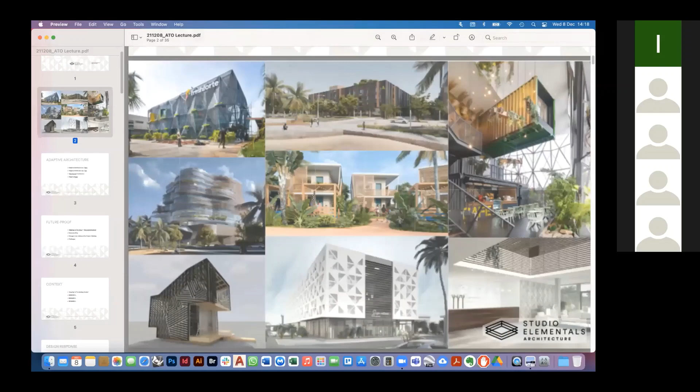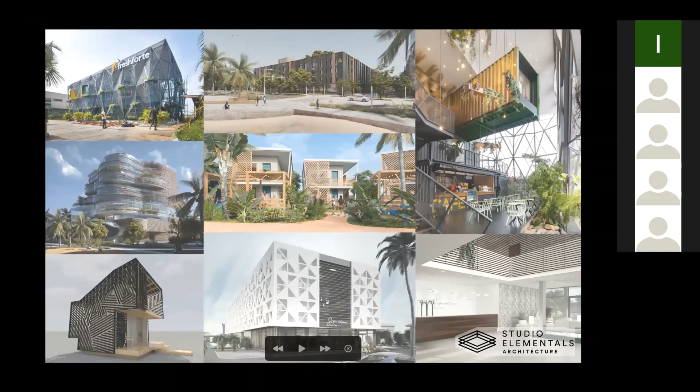Okay, wonderful. So I would like to start with mentioning that our work at Studio Elementals strives towards making a positive impact on emerging urban environments, which are very rapidly changing. And therefore, the theme of adaptive architecture means a lot and is really important to me personally as well. Adaptive architecture can be used as a term, and it usually means a framework which changes its structure, behavior, or resources according to request. It's often driven by internal data and also includes buildings that are designed to adapt to their environment, inhabitants, and objects.

Adaptive architecture can also be used as a tool, and it is there to create buildings which are flexible, sustainable, future-proof, rather than fixed objects trapped in a particular context and time. And there is also adaptive reuse that can be applied to existing buildings. Now, if we look at the term future-proofing, it's quite a broad term that can encompass not only buildings and infrastructure, but also communities, cities, countries, or the whole planet. It has adopted different meanings as well within different contexts, ranging from resilience to climate change to demographic changes and resource security. So the question is how changes might happen in the life of a building, right?

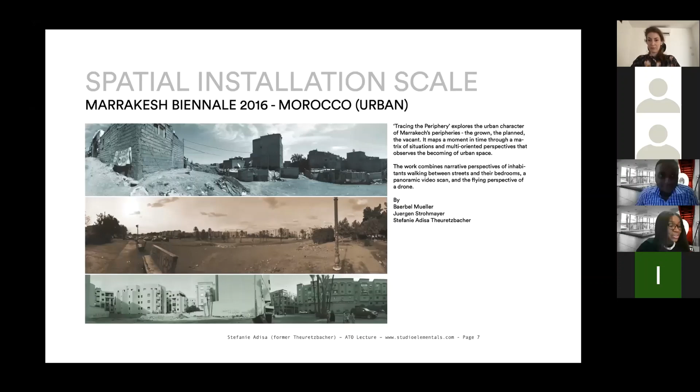And the project explores the peripheries of the city through various different ways. So it's basically a spatial research that was done with the help of a video installation and drone shots, as well as perspective views and also flying and also inhabitants walking between the streets. And this was later on put into a spatial installation that was quite immersive into these dome-like structures in Marrakesh and as well in Accra for the Chale Wote Festival.

And I think this is a more alternative way of research. It's not research per se in the academic way, but it is research that is very valid in the architectural world, and that can also help us portray different experiences of the city.

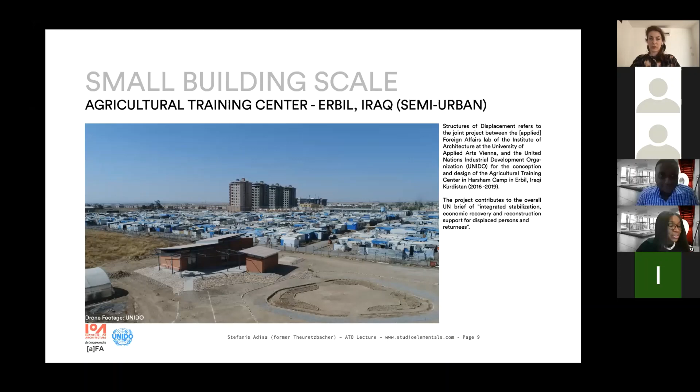The next example is a small building scale, and I would like to use this agricultural training center that was a collaboration between the University of Applied Arts Vienna and the UNIDO. And what was special about this project was that the scope and location wasn't clearly defined. So a lot of research had to be put in place ahead of time to even understand the location. This project was meant for internally displaced peoples in Iraq due to ISIS and the recent difficulties in the area.

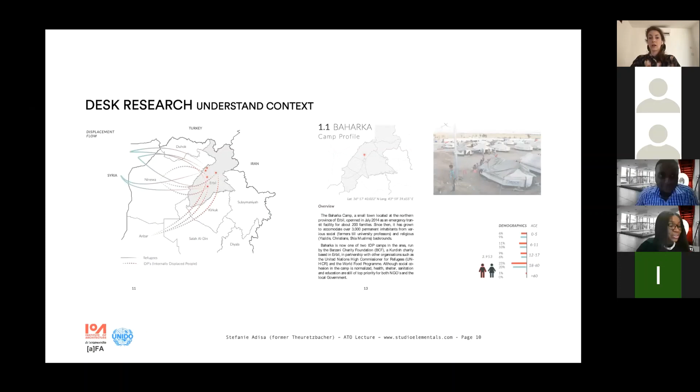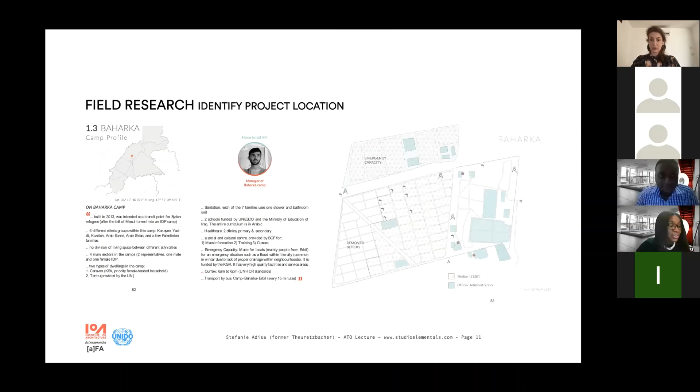And ahead of time, a desk research was done for several months actually to research different flows of IDPs into the area and also into existing IDP and refugee camps in the area. And at the same time also doing a field research on site, trying to understand the views of people, doing a lot of interviews, also walking through existing camps, looking at their organization and how that could possibly impact a building design, also understanding the spatial setup of such a camp.

And in the process, we realized that a lot of infrastructure is actually already in place, but what is missing is a space for women that can be a safe space and also a private space for them to undergo training, but also just hang out and have a good time. Then there's always the possibility for additional research once a project has been completed. In this case, there was a student project after which an exhibition was also held at the University of Applied Arts and an additional publication.

So I think in architecture sometimes this post-production phase kind of gets lost because we have a lot to do from one project to the next, but it can't be enforced enough that this post-production is also a very important tool for understanding our next goals and also understanding how we can adapt to the future and to other projects.

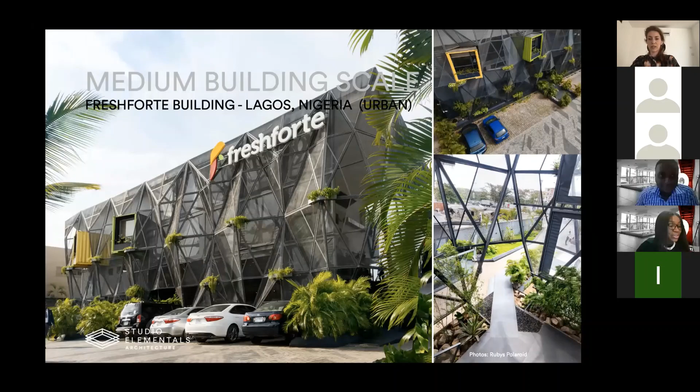Then I would like to continue with a medium building scale. This project is located in Lagos on Admiralty Way, and the special approach in this case is how the building is embedded into its surrounding context in a way that it is more accessible to many people around compared to other projects in the area. So a lot of detail has also been put into the landscaping, and you can see that the site is very open.

It's almost as if the street kind of draws in to the building and includes the building into its urban environment. So to me, site plans are a very important tool to show context and to understand context and how we can work with it. A lot of times people see the site as one rectangle that is independent of the rest of the surrounding, but that's not the case for us architects.

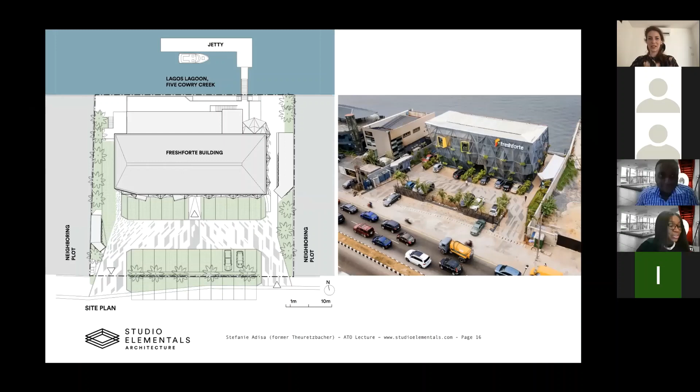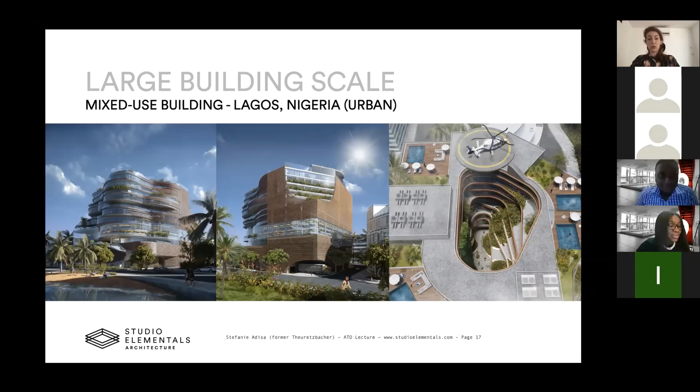Then I would like to also give a large building example. The client was into agriculture and requested for a lot of urban farming to happen in the building, and also a lot of planted elements. So to prepare for this project, we did quite a lot of research into this direction, and I will lead you through that in a second. What was also special is the location on Gracefield Island in Lagos off Chevron Drive, which means that we have an empty site. There is no immediate context, and we now have to draw from maybe history, cultural elements, and we need to come up with a design story that is still interesting and has an impact on the building.

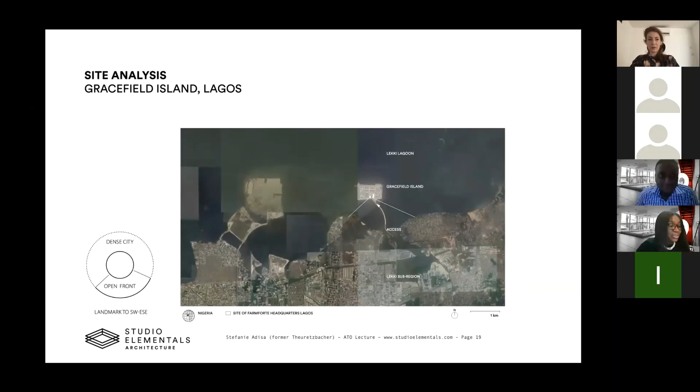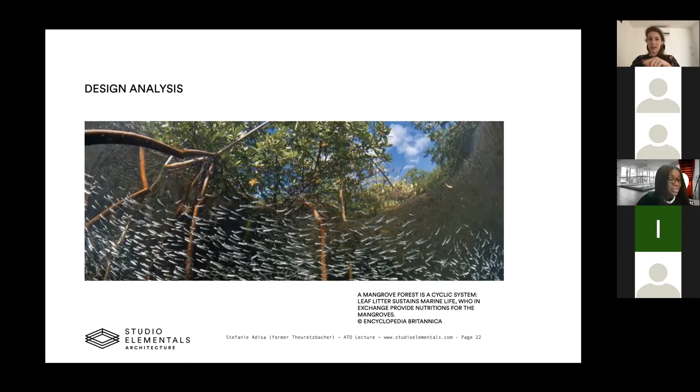So of course, we always have to do site analysis and also wind analysis, very important in such a case. And we looked a lot into urban farming and how this could be integrated into a building, such as outdoor community gardens or vertical gardens or even greenhouses. In the process of that, we also realized that the initial natural environment of the Lagos Lagoon was mangrove forests, which kind of has been forgotten over the years because now we only see buildings and water. And mangrove forests are actually quite fantastic in the way that they form a cyclic system. And I will explain that more here.

So once leaves from the mangrove drop into the water, they actually decompose, become nutrients for little fishes and oysters, which then become food for fishes, and then the remains go back as nutrients, which then are treated again by the mangroves. And it's quite interesting because this same system is used in aquaponics, where you use a fish farm to water plants. So the nutrients of the fish remains are pumped into the earth and become nutrients for plants. Then the plants clear the water, which now becomes a beautiful cycle.

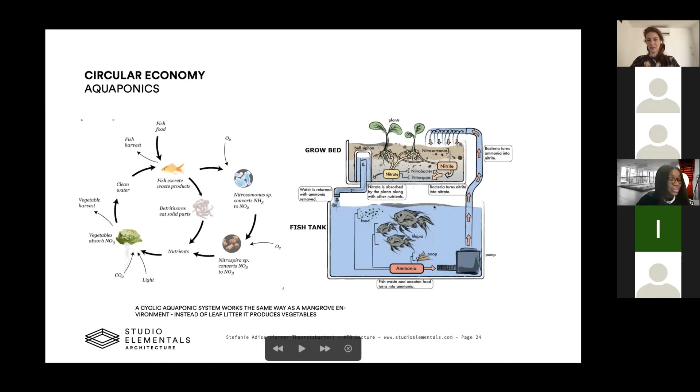And these two logics can actually be transformed into a building logic as well, if you think about it in broader terms. So a public lagoon, or let me say, a dense rooting system could be a warehouse, for example, or the water level could be an aquaponics pond, and so on.

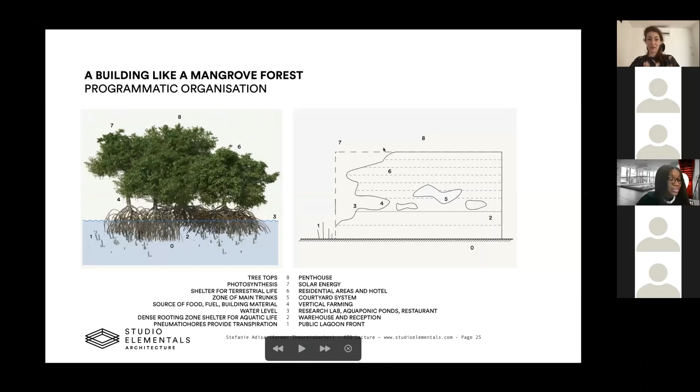So you can really translate this mangrove forest into a whole building with its different elements and draw from that as an inspiration. You can even take several elements of this mangrove forest and turn them into architectural elements such as screens, facade elements, and just spatial moments.

So what I'm trying to say is really that if we do our research and also take inspiration from further away, we might also come up with something very meaningful and interesting and new in the current context that we are in, something that is for the future.

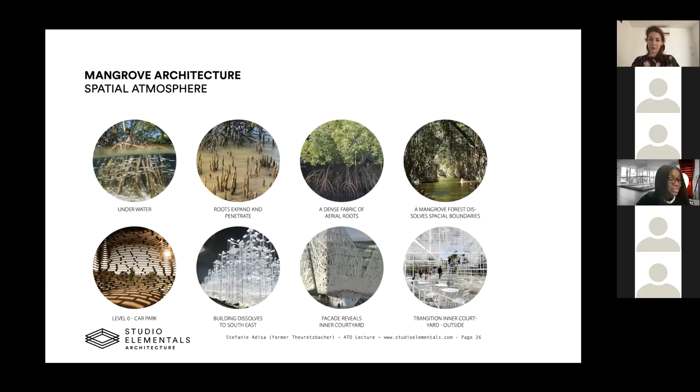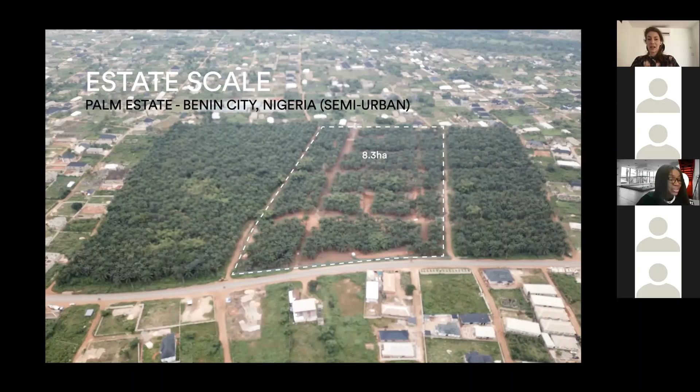Then the last project is on an estate scale. It's called the Palm Estate because the project is located within an existing palm plantation. And what is wonderful about this to start with is that we have existing trees that are even in a grid. And second, we have the very rich Benin building culture that we investigated in the course of this project. So there's actually so much to draw from existing cultural knowledge or even lost cultural knowledge.

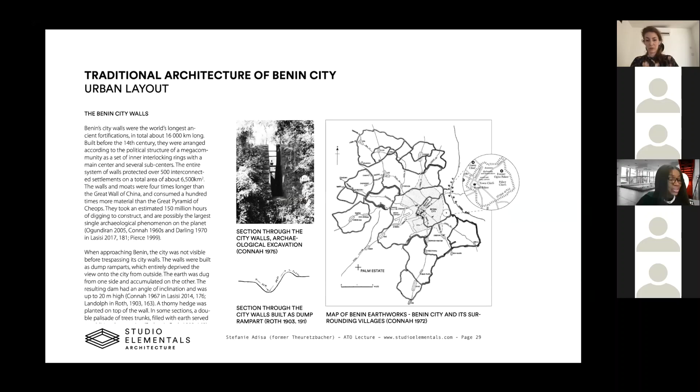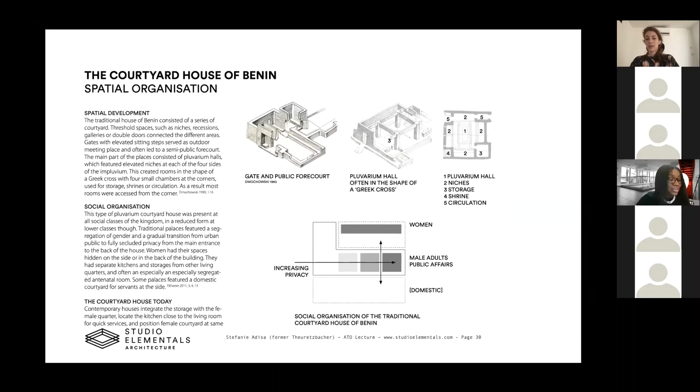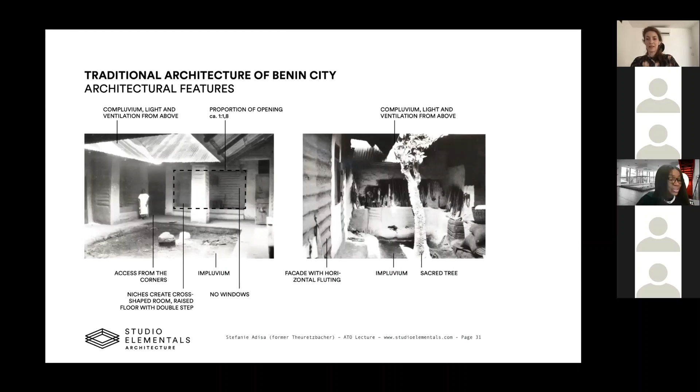There is, for example, the urban layout of the old Benin city, which was actually the longest wall system in the world, which is so interesting, and a lot can be drawn from that also in terms of section. There is the traditional courtyard house of Benin, which goes from more public to more private buildings. And then we can also learn from the courtyard systems, from drainage systems, impluviums, and trees within our buildings, and how that also translates into a whole estate layout.

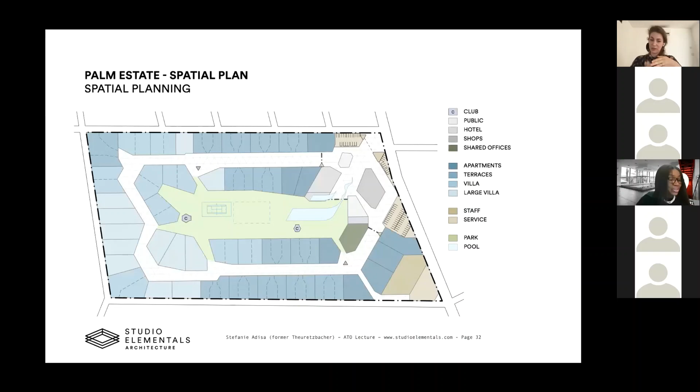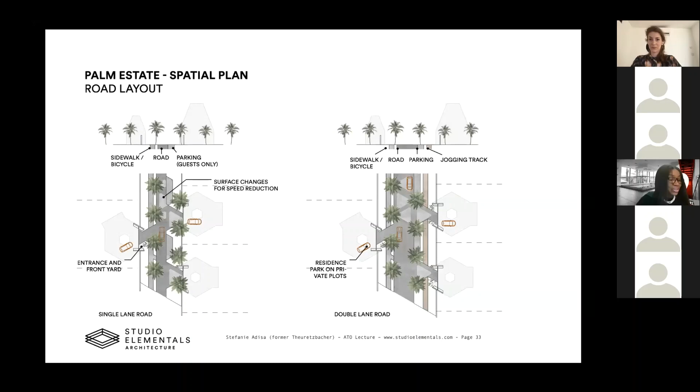So we followed the palm grid, which is actually a triangular grid. So you can't have a rectangular street grid working with an existing palm grid. And this can also follow into the details such as driveways and how the street feel comes about. Everything becomes different, and the palm grid is something that you can really rely on to come up with a more interesting or more adapted design solution. This would be the result of it. So it comes up with a spatial plan that is way more organic compared to a rectangular grid.

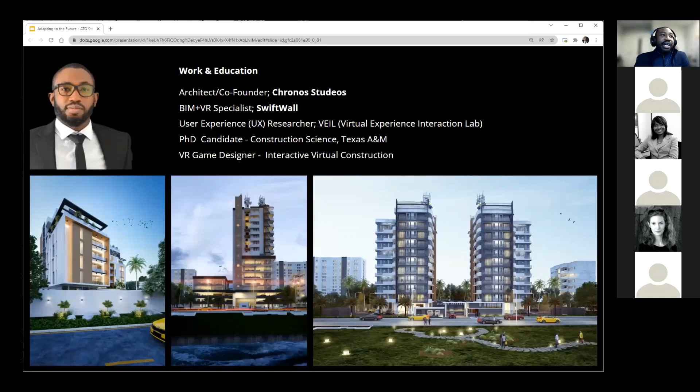And now today we'll be looking at content regarding first adaptation. We're going to look at the past and the future. And also we will look at questions and opportunities in architecture, engineering, or construction. We're going to also talk about collective intelligence, which usually is an ultimate power.

And also we'll talk about VR, AR, and AI, standing for virtual reality, augmented reality, artificial intelligence in architecture, engineering, and construction. And we'll be thinking about the whys, the whats, and the hows. We don't have a lot of time to cover AR and AI today, so I'll talk mostly on what I'm doing on VR.

So here is my popular, I call it my popular, quote about the future. I always think that the future is an opportunity to connect the dots for humanity. We must embrace it to build better living, more productive businesses, and ultimately happier people. Keywords, ultimately happier people.

As much as we see how everyone is trying to think about what the future is like, one thing is important, and that is we need to make sure that people have better lives, with the living conditions, the jobs, the businesses. Ultimately living in great conditions and being happy is something we need to consciously gear our objectives towards, because there are a whole ton of global issues that we don't even want to start talking about. But again, if we start here, we probably may be able to conquer all of those big issues. So let's look at what adaptation is in the past and in the future.

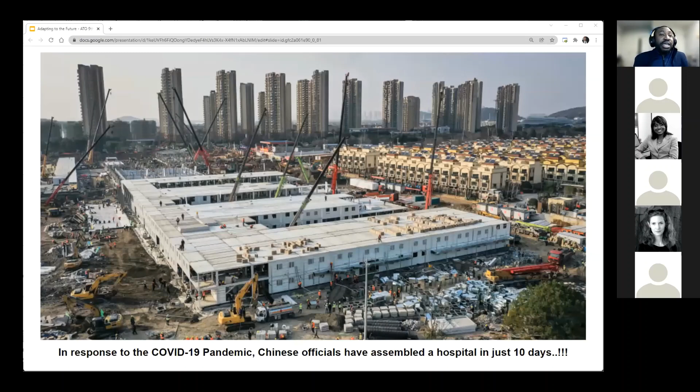And in this particular case, robots were delivering medicine and collecting test samples instead of nurses doing that. So we got a rude awakening to say that, look, the world is moving very fast, and now we're going to that interface where humans and robots are actually going to start interacting. Now, beyond all that you see, there is a ton of stuff that goes on behind the scenes.

And usually I split everything about a business or any model that works into three. You have a product or service, you have a process, and then you have people. And there is a ton of things that make all of this work together. There are touch points where the outside world sees, there are interfaces between the outside world and the inside. There's cloud synchronization of files and data, everything is live. And of course, a lot of times there's also local storage as backup in case of failures.

Then there's a ton of collaboration across disciplines. And when you're collaborating across disciplines, you have to have an idea to an extent of what the next discipline is doing. That way you can infuse your own professionalism, your discipline, and make the best out of it. There's security, there's encryption, there's data protection, there's outreach. How are we telling people what we're doing? How are we showing what we're doing?

I mean, just imagine that the live stream was actually set up even before the construction started. Who thought about that, right? It wasn't just a response. It was well planned and thought out. And then there was analytics. How did we do? How much did we cover? Where did we fail? What are the responses? What was the perception? What can we do next to make things even better?

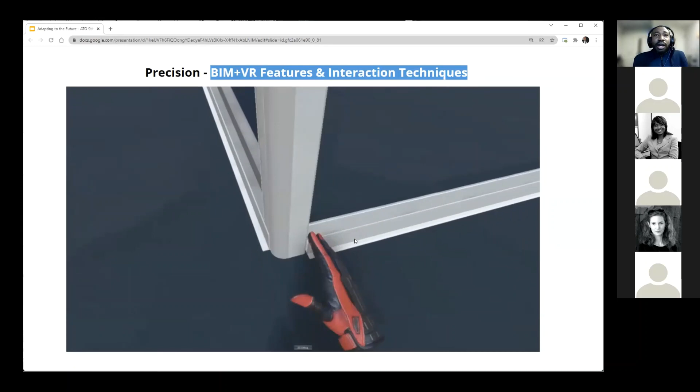So we did some testing on precision. And very interestingly, we were able to get the precision to almost a 0.01 precision level, which was very tasking. It was a lot of coding. But again, there's a lot to learn from this. We got very interesting interaction techniques to learn from.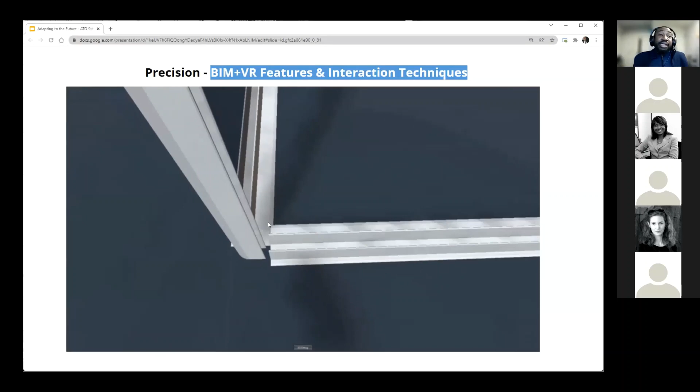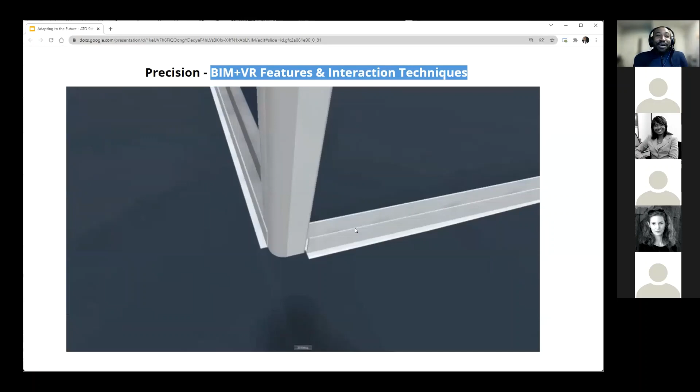And we were able to achieve huge precision and a lot of realism, lighting, texturing, baking, and scaling. And we actually realized that people performed better when the objects were slightly smaller than the real-life scale objects. For some reason, we don't know what that reason is yet, but that was an interesting find.

So let's talk about the quick results in how we were able to match reality with virtual, matching performance between physical and virtual. And we actually realized that there was a lot of similarities in the performance, timing, especially after we started to optimize the game. We increased the frames per second rate. It was smooth to play. There was no lag. There was no hardware interference.

And we also realized that being able to do all of this in VR actually cuts down a lot on having to prepare physical training materials. We saved on a lot of carbon footprint and cost. And also, this basically gave us grounds to work on a commercialized version where people can actually pay on a subscription plan or any kind of payments and get trained to carry this product.

So here is the takeaway from my presentation today. It's important that professionals in the architecture, engineering, construction industry actually have a lot of self-development and adaptation to career opportunities. It's going way beyond design. Everything doesn't end at design nowadays. A lot of things are changing.

So it's advisable that people don't get very stuck in the mindset that, oh, I have to be able to design a 50-floor building. No. Sometimes you might have something else to offer as an architect and still be on that 50-floor building team, really. So make sure you're developing yourself, learn as wide as you can.

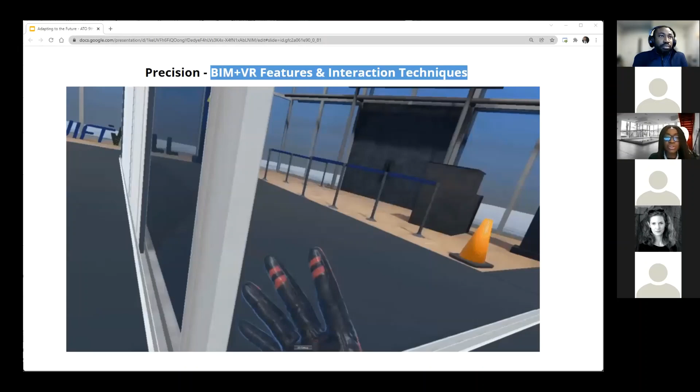COVID-19, for example, has taught us as an office, as a firm, and as an organization, that we needed to collaborate more. Some of the things that we talked about pre-2020, we talked about moving our information into the cloud. We talked about collaborating between our various offices, because we have offices in different parts of Nigeria. We were forced by the pandemic to actually make that a reality. And we found situations where we have design teams comprising people in different locations, and being able to leverage the strengths and capabilities of one person in one office to collaborate with somebody in another office. And that was really important.

Something that struck me as well was using BIM to sort of test run ideas, trial, does it work? Is it going to work? It's less expensive than finding out on site, and that's a mistake a lot of people are making. Some people are not investing in this software because they think it's expensive. I think it's more expensive to make the mistake on site. And so we should be thinking about things like that.

And then most importantly, the interviews, talking with your end users, finding out what's important to them, in a way, democratizing the design process. So yes, design is very important, but right now skills beyond design are required to be effective, to be effectual, and to adapt to the future, because you can design something that is stuck in today and it doesn't mean anything to the end users. Changes so fast. Yes, it changes so fast.

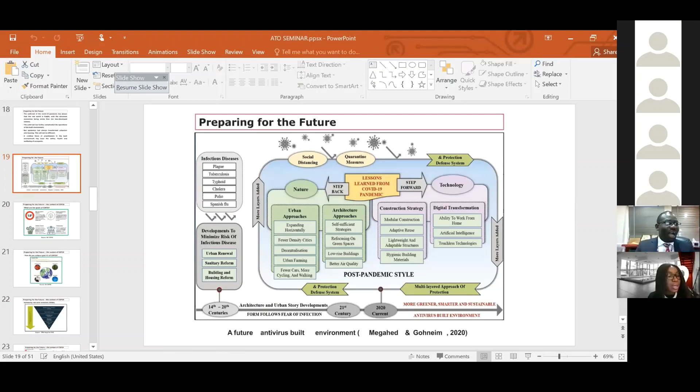So, okay, I will reshare it, but I will just quickly explain for the sake of time that we step back into nature and we step forward into technology. As we step back into nature, we look at urban approaches in addressing this problem in terms of expanding horizontally, fewer dense cities, decentralization, urban farming, fewer cars, more cycling and walking, and architectural approaches in self-sufficient strategies, refocusing on green spaces, low-rise buildings, better air quality.

And we step forward into technology, as Hassan had rightly presented it, in modular construction, lean construction, adaptive reuse, lightweight and adaptable structures, hygienic building materials, the ability to work from home, that's digital transformation, artificial intelligence, and touchless technologies, where robots and humans can easily interact. That is stepping into the future, that's technology. But I believe sincerely that our solution is in the combination of the two, nature and technology.

And we need to bring this together, even as we look at the goals of COP26, which are essentially for net zero. Countries are called to reach net zero carbon emissions by 2050 and to keep global temperature below 1.5 degrees centigrade. And we can see all the other goals as shown here. In reaching this goal, we must phase out coal, have more renewable technologies, reverse deforestation by 2030, and have electric vehicles.

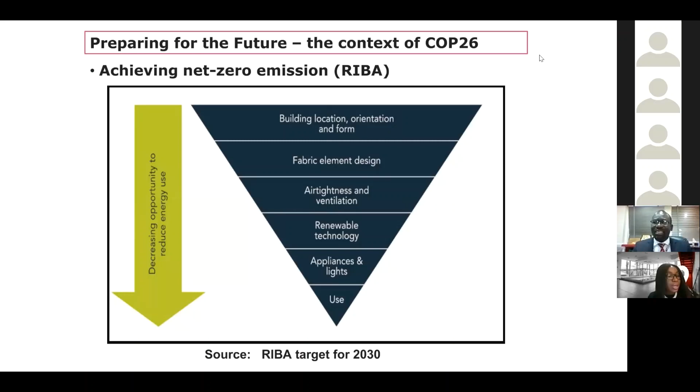And in achieving these net zero emissions, training also has to be in terms of the design of buildings, location, orientation, and form, which occupies the large band in this graph, and the lowest one has to do with use. So you can see from this chart that rather than relying more on appliances and gadgets, it all begins by getting the design right in terms of location, orientation, form, and fabric elements. It is through this we can essentially reduce energy use in buildings, just the same as in achieving the 17 sustainable goals, out of which 10 relate directly to the focus of our discussion today.

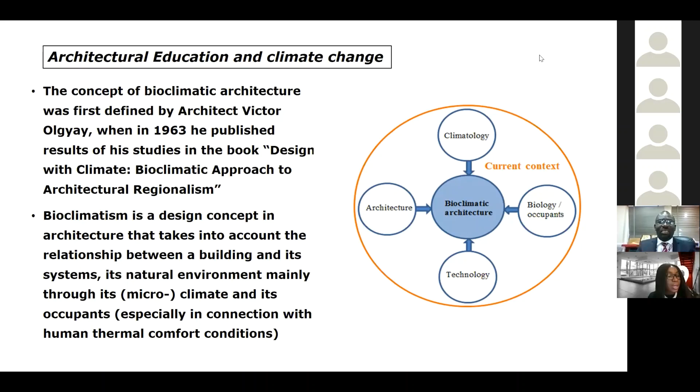So the future of architectural education is quite interesting. We know it's not static. Environment is not static. Nature is dynamic. Therefore, architectural education is expected also to be dynamic. If we take a lesson from the bioclimatic design of Victor Olgyay in designing buildings with climate, we find that even beyond bioclimatism, the origin of the bioclimatic approach itself can be traced to vernacular and traditional buildings. And that's why I am advocating for the combination of nature and technology in solving this problem and in training and looking into the future.

And the same thing we have today as sustainable architecture, green architecture, regenerative architecture, biophilic architecture, biomorphic architecture, biomimicry, smart architecture, biotech, and high-tech architecture can all be put into one box as relating nature with technology.

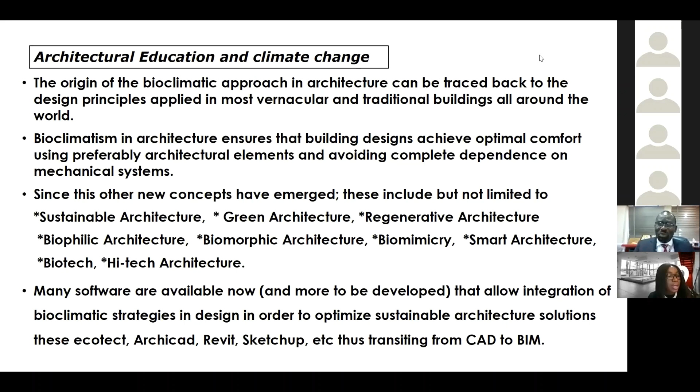And again, we have with us different softwares that have been developed, and all these softwares put together, Ecotect, ArchiCAD, Revit, SketchUp, all transiting from CAD to BIM, and that's what we have. So, ladies and gentlemen, in conclusion, I would like to conclude quickly by attempting to answer some 5 pertinent questions and also quickly present to you a project, which we have just concluded, that peeps into the future.

The first question is how students are prepared for the unpredictable future and the challenge of climate change. And I will simply answer by saying, yes, our students are being prepared, by virtue of what is currently happening in the modules, in the course and in the teaching, emphasis being placed on occupant safety, health and comfort, on architectural science, on sustainability.

The second question will be, what are the extant modules in preparing these students for climate change? In all those 8 modules that I've enumerated, it only means that from time to time, we look at the contents of the courses and improve on those contents, also applying further innovation and findings from research and technology in improving even the course delivery, curriculum, and the way and manner these courses are being taught.

The third question has to do with the degrees, whether there will be any change or not. I believe very sincerely that the 2-tier degree structure for training architects will still be the best option. However, as I've said, curriculum is being changed from time to time, and there are higher and professional degrees in MArch, in PhD architecture. I would rather prefer that architects only will have PhD in architecture, but others will have PhD landscape architecture, PhD in architectural studies, as we have in reputable institutions abroad.

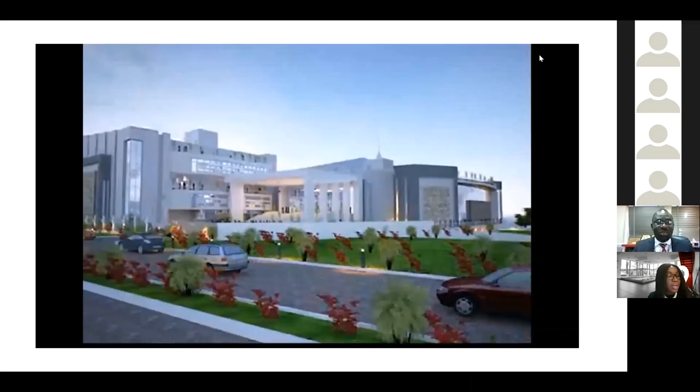And the final question as to how does practice dovetail into teaching? Give me some few minutes in answering this question, because that will help us with the design portfolio and the project that we have just concluded, that I'll quickly show us now, which is the Citadel project. And we'll see that this is an animation. The design was done about 6 years ago, but it's currently standing now. And we'll see the animation compared to the live building as the building is standing.

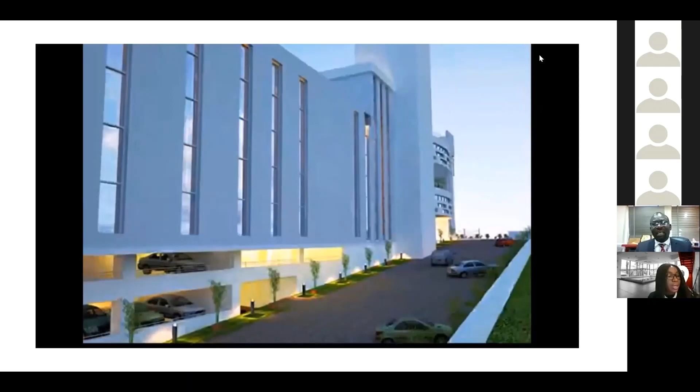But what is interesting here is in the design, the flexibility, the adaptability, the sustainability, and the approach to the design, a church design, essentially the worship center, the auditorium, over 5,000 seated capacity. But beyond that, there are other facilities like classrooms that are used on Sundays for Sunday school teaching. But between Monday and Friday a full-fledged school is going on there. That's the kind of adaptability that we're talking about.

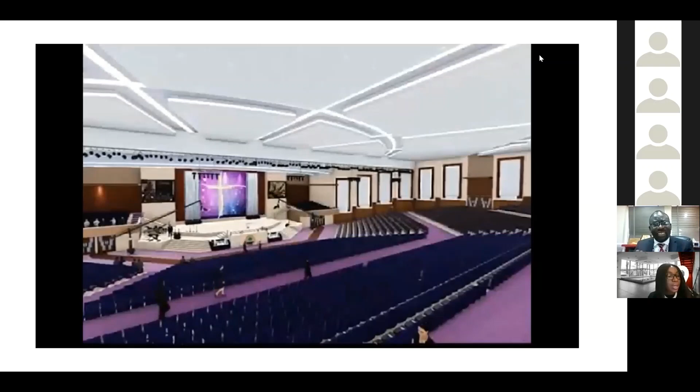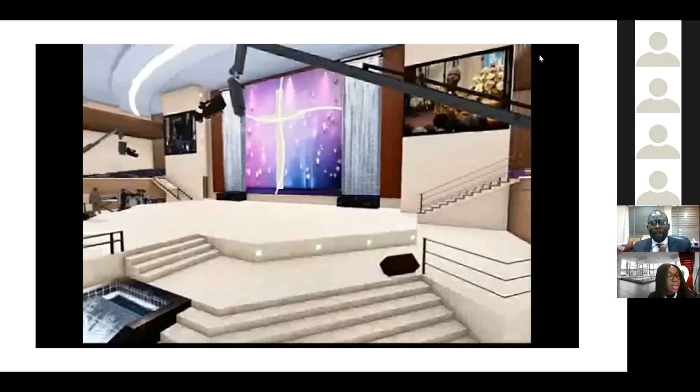This facility functions 24/7, not just on service day, 7 days a week, because of all facilities in terms of training. You could also find the youth center, youth connect center, health facilities in terms of the swimming pool, the gym, the sauna, as we will see right in this animation.

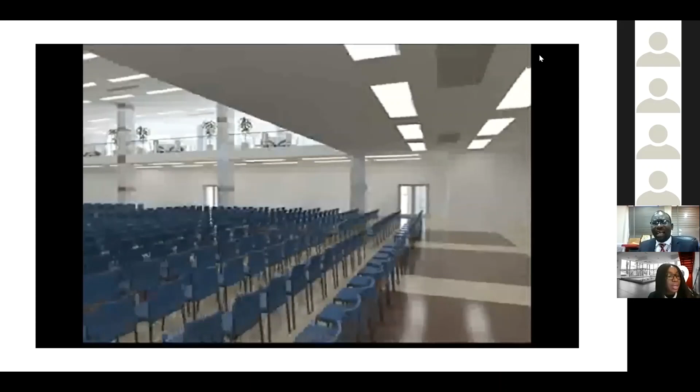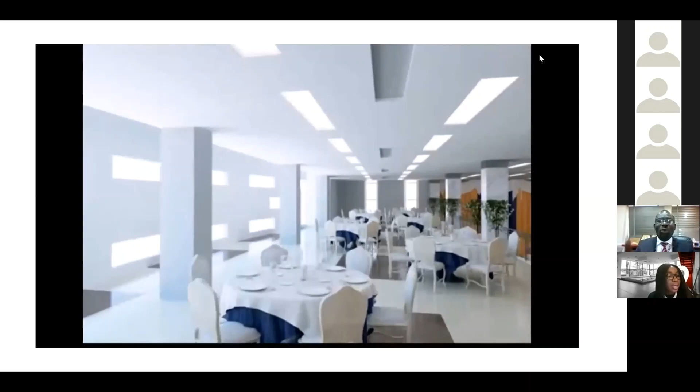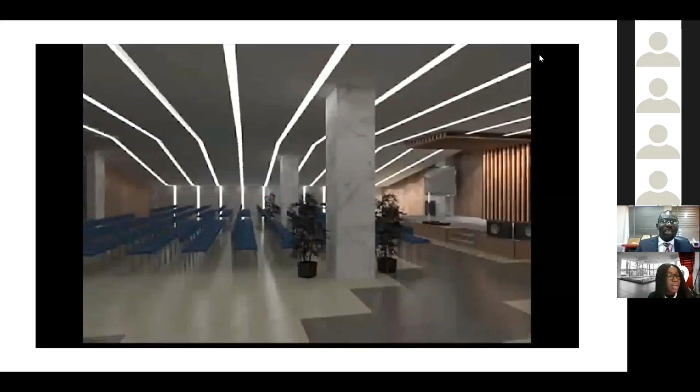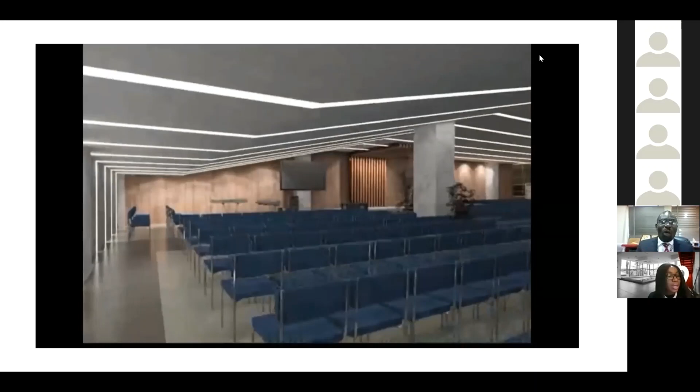So essentially, we're saying that as we look into the future, even in analyzing the client's brief, analyzing and synthesizing to come up with a design, we have to prepare for the future in terms of adaptability, flexibility, and reducing carbon emissions in all we're doing, and engaging in softwares and technology, in being able to solve the problems of the future. And students have to be engaged in this all through their training. That is why even the students are involved in this practice.

What we are seeing right now is an atrium within that same facility where you have a greenhouse effect. And this is showing part of it in terms of the library, the bookshops, and facilities that can be used by the community.

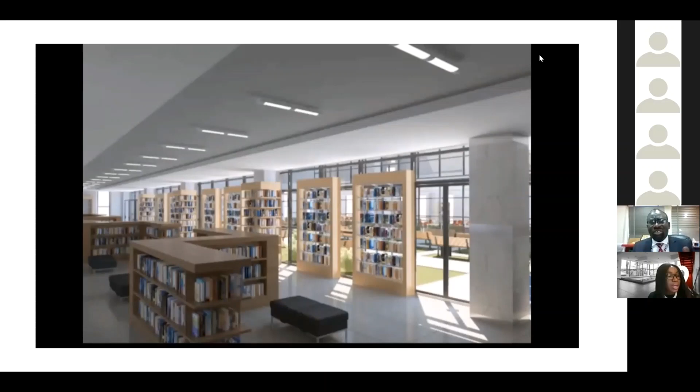Because I believe essentially that our buildings must be energy efficient, it must be community inclusive, socially relevant, and it must be ecologically balanced. And in putting this together is how we can address all these for the future.

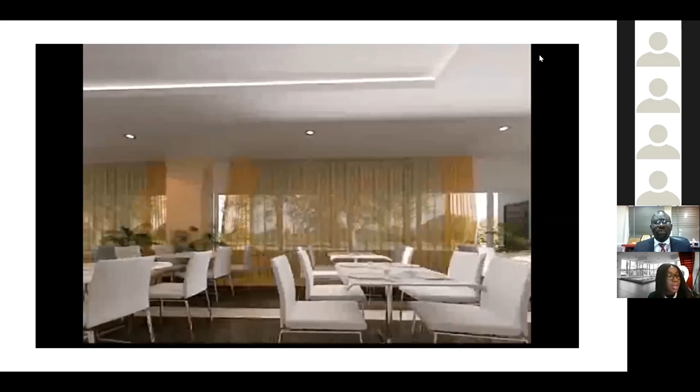And this is the reality on ground. That is the animation, and this is reality. And you can see that there is really no difference between that which was proposed and that which eventually had been executed here.

So in going forward, in closing, I would like to say, we could see that even before the pandemic came, this design had been done. Now we are faced with the pandemic. We don't know what else will happen again. But our design as architects ought to be trained in a way that we will not panic. This will not come as a surprise, because essentially design has been done in order to take care of these

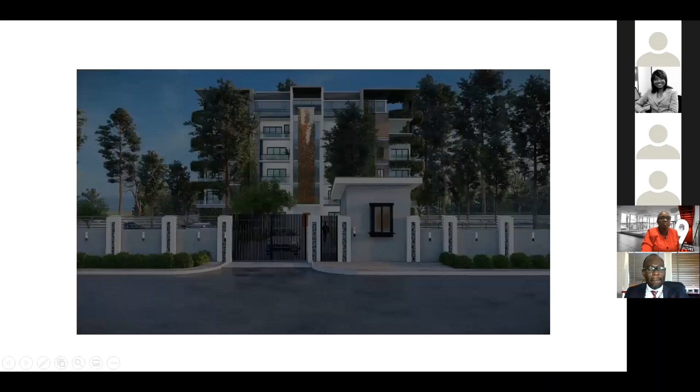So this is the first entry from Adefila Inioluwa. And the title for this is Home for Remote Workers. Like I said, the aim of this design is to see how well they can translate the brief and then give us a design ticking off the boxes the questions have set through the design. So this is one of the entries.

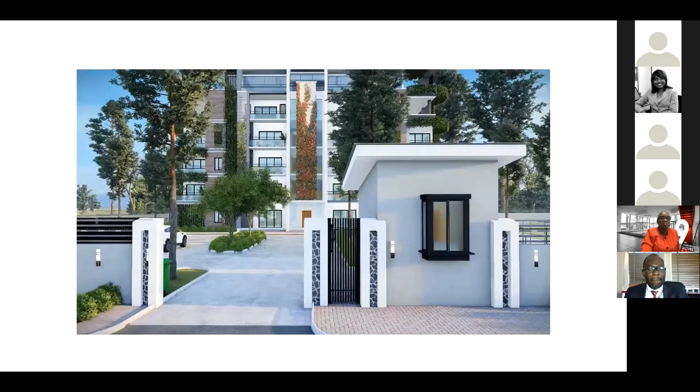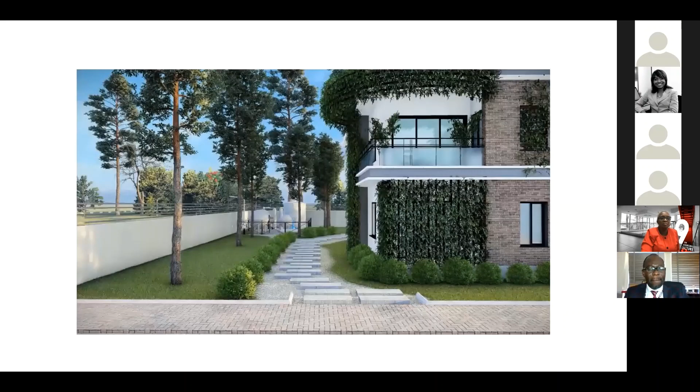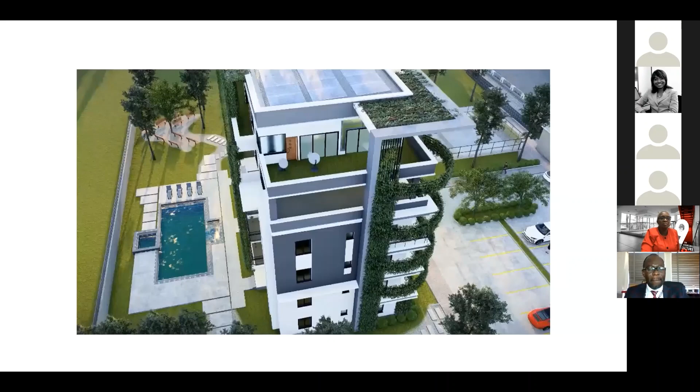It seems like a multi-story apartment building, contemporary design, using sustainable materials. Of course, if you see from the facade, it has a lot of active green elements. You can see some climbers, more or less enhancing the immediate microclimate, as well as enhancing the biodiversity of microenvironments. So that's the first entry. Please know that because of time constraints, these are just a summary of their entries, just to help us understand what their final designs entail in terms of the brief put out.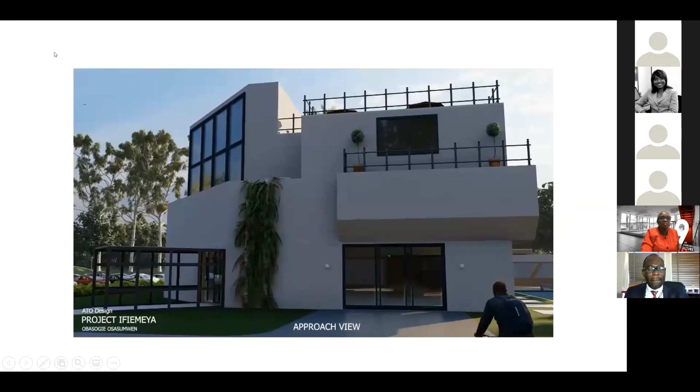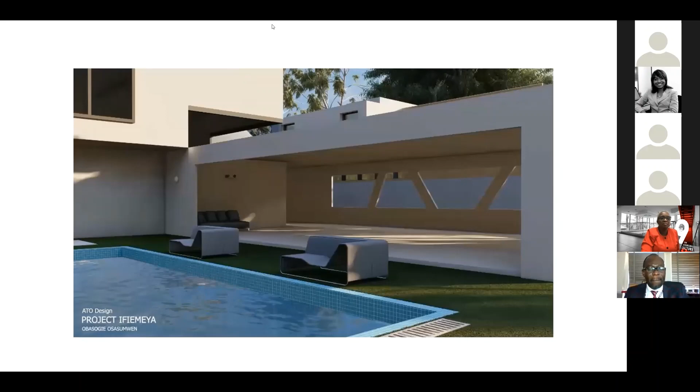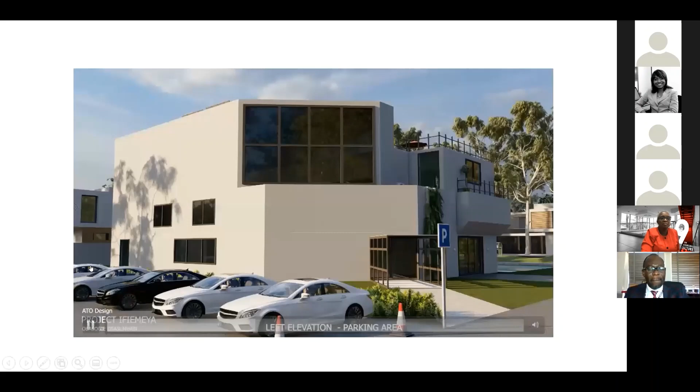So this is the second entry, and the title of his design is Modern Workspaces. I'm sure from the brief, he wanted to highlight the multifunctional use of spaces, because every brief now talks about how flexible spaces can be. As humans are evolving, their immediate needs evolve. So it is important as architects to come out with flexible spaces that we can use in our designs, creating flexible solutions and answering our client brief in more than one way.

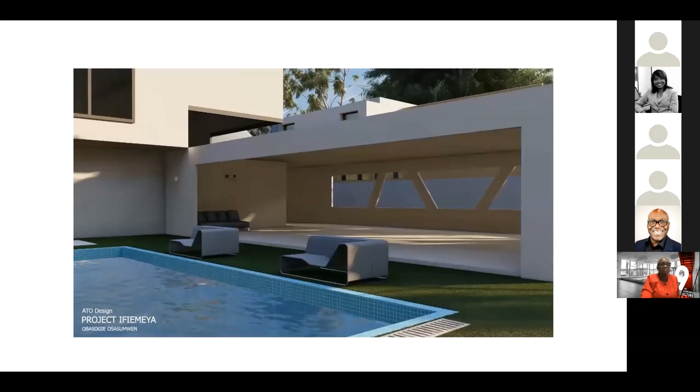Someone, can you please mute your mic so that it doesn't get too distracting. Thank you.

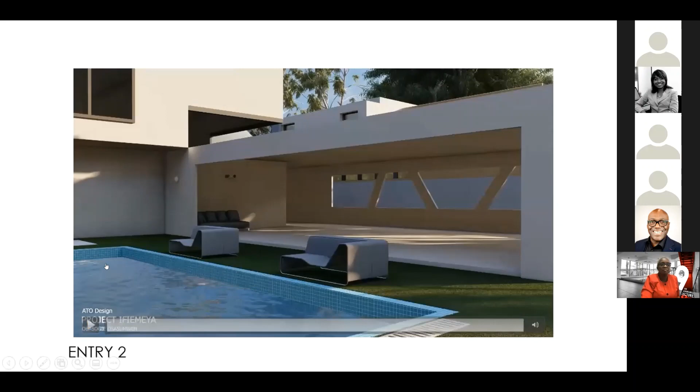So in summary, for the second entry, he has created a flexible workspace, answering the questions raised in the brief. So this is the third entry from Muhammad Aliyu, and the title of his design is Creating an ICT Institute located in Kano. As I said, the brief was not location specific. We actually intended to see how you can adapt your design to the local context, putting into consideration the design goals, how you'd intend to make your design answer these questions.

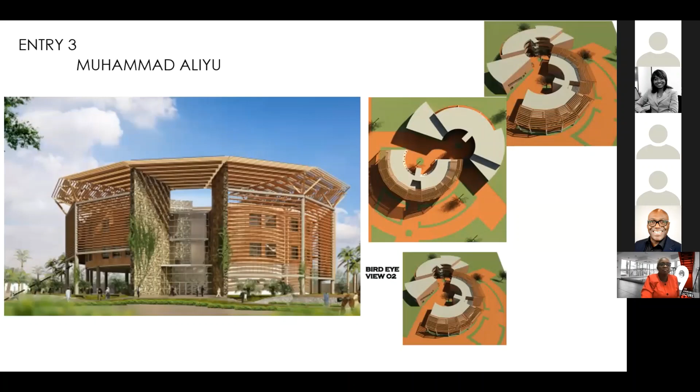So from what I can see, which is what I believe you're seeing as well, it looks like prefabricated timber is used as a predominant element in the facade. Also, it has welcoming green elements. You can see climbers and some stone features. I'm sure this particular entry has a lot of strong boldness in its expressive elements. Seems very much expressive, still answering the question stated in the design brief. I don't know if that's the only visual we have from that particular entry.

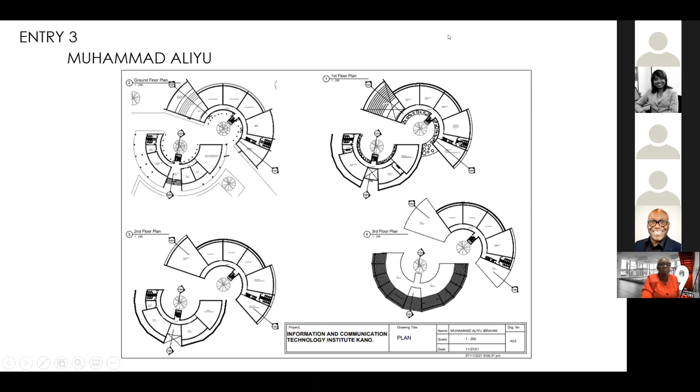But like I said, the mode of assessment has to deal with how well the design answers the questions stated in the brief, and how designs can adapt to the current climate. So based on these three final entries, we are going to announce our winner. Just give me a second. And the winner of this competition is Muhammad Aliyu.

Of course, all participants had brilliant design ideas, which were highly commendable. But Muhammad Aliyu more or less answered these questions predominantly from the brief. He ticked off all the boxes, and his design came closest to answering the questions we asked in the design brief. So congratulations to Muhammad Aliyu, who is our winner of this year's competition. On behalf of ATO Architects and ATO Sales, I say a huge congratulations to you, Muhammad Aliyu.

Thank you very much, Mudiade. Again, congratulations to Muhammad Aliyu. The competition entries were reviewed by a panel of three architects: Tosin Oshinowo, who many of you know, architect Adebamowo Shokumbi, and our managing director, Ekaite Basi Fuja. I want to thank our jurors for the time and attention taken towards reviewing these. I want to also point out that this competition was open only to students of architecture.